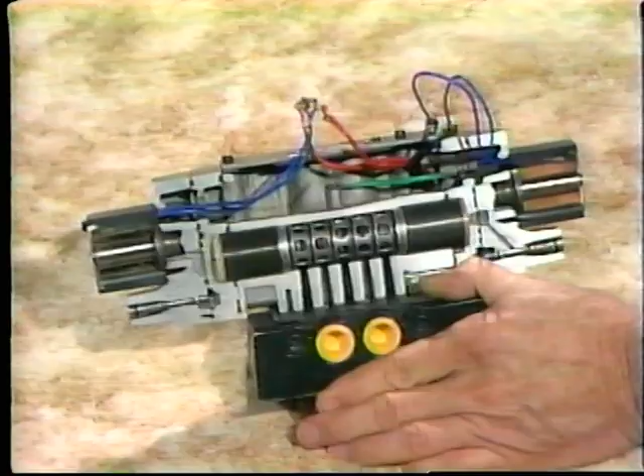Let's start by looking at basic valve design. Directional control valves must be adequately sealed, and we can obtain this sealing either with a shear action or by using a poppet valve. We can demonstrate shear action with this cutaway. You can see that as we move the spool, these lands slide within the valve body.

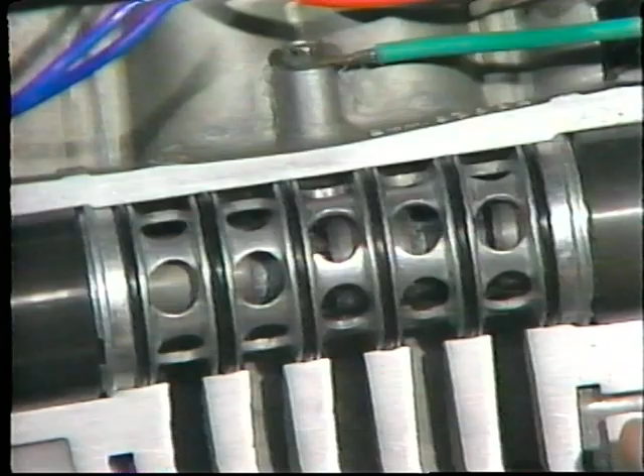When they are in the right position, they close off the desired passage by shearing off the airflow. There are four basic types of valves which use sliding or shear action elements: sliding plate or rotary disc, lapped spool, packed spool, and packed bore.

This is what a sliding plate type valve looks like. This part here is referred to as a D-slide. As you can see, it slides against this mating surface and alternately connects and disconnects these passages here.

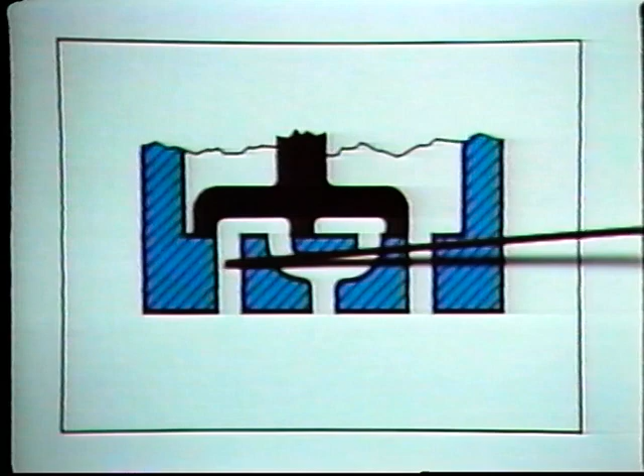In this position, outlet 1 is connected to the exhaust here, while the supply is connected to outlet 2. Here, the D-slide is positioned so that all valve ports are blocked. And finally, when we move the slide all the way over, outlet 1 is connected to the supply, while outlet 2 is connected to the exhaust.

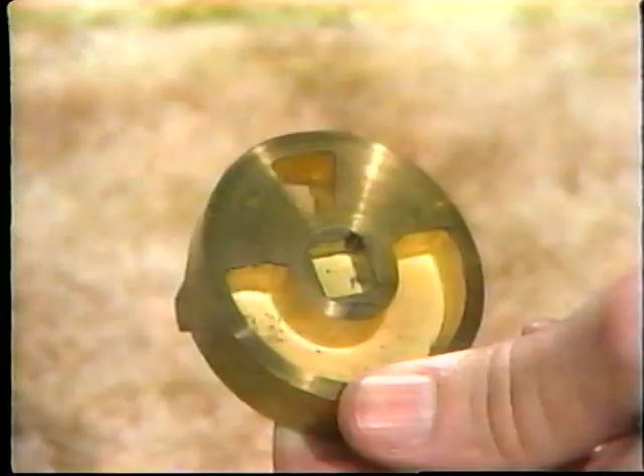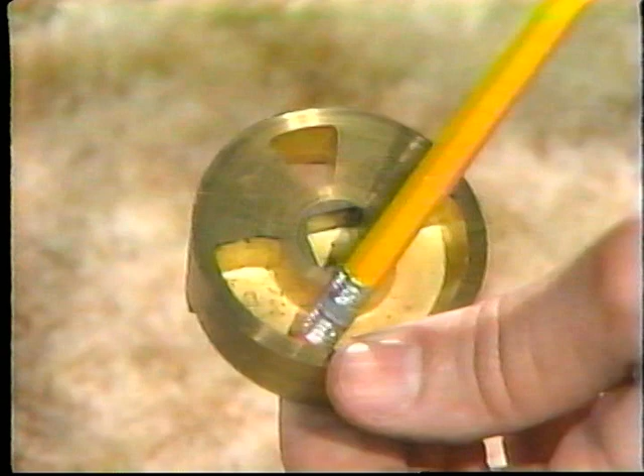We can get the same type of shear action with what is called a rotary disc valve. Here is a disc from a typical rotary type valve. This particular one is intended for 3 positions, and the cutouts are located in the disc so that in the neutral position, all valve ports will be blocked. In fact, openings in the disc can be positioned to achieve all the standard valve center positions we covered earlier.

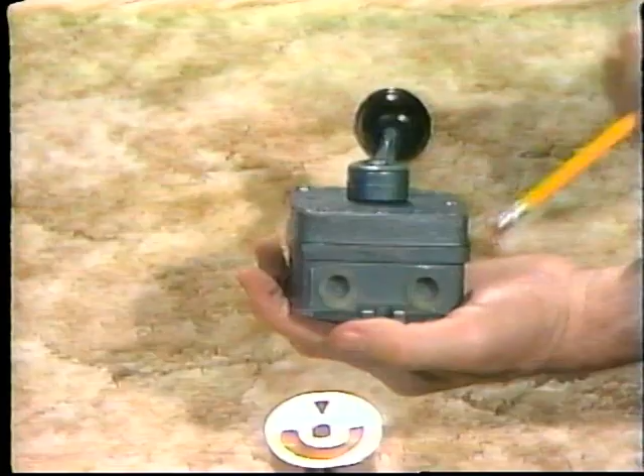Here is what a rotary disc valve looks like. These are the valve ports here on the base of the unit. And this lever here is used to position the disc within the valve.

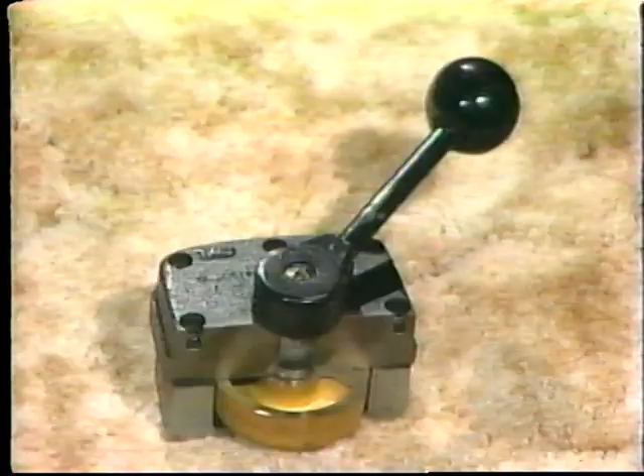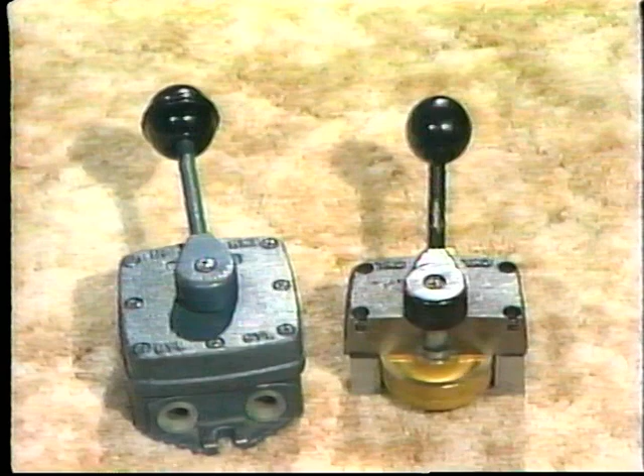The sliding plate and rotary disc type valves have a number of advantages. First, because they have a sliding action, the valve mechanisms tend to wear in. This means they are capable of many trouble-free cycles even under adverse conditions. For example, they work well over a wide range of temperatures. They are virtually unaffected by lubricants or contaminants that might be in the air lines. And this type of valve tends to keep out foreign material from between the mating surfaces.

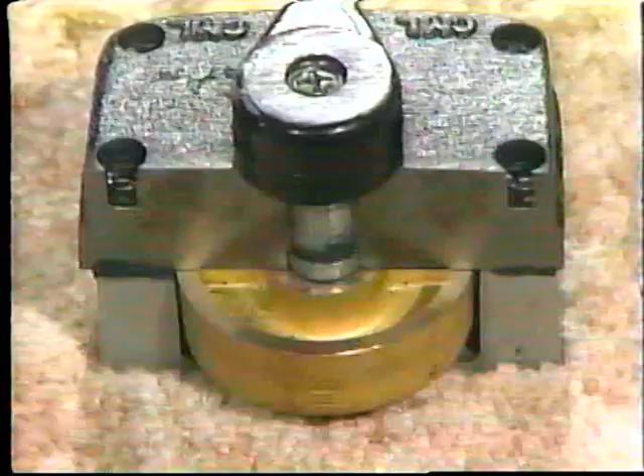You should note, however, that at high line pressures, large forces may be necessary to shift the valve slide, and the valve must be continuously lubricated in order to get maximum life from it. And if the pressure under the plate exceeds line pressure, the sealing member can be forced from its mating surface. So a sliding plate valve may not be suitable where such pressure conditions can occur.

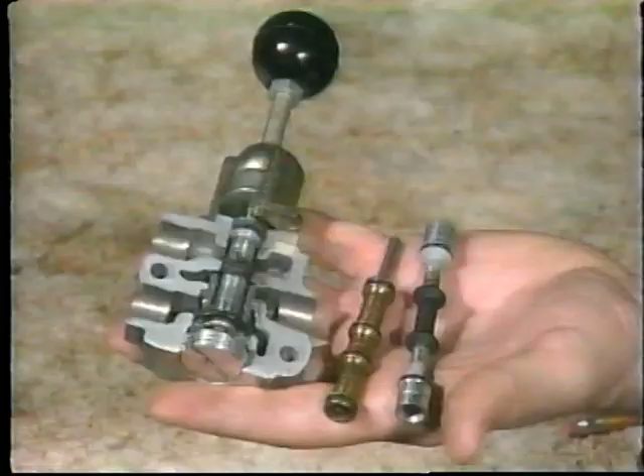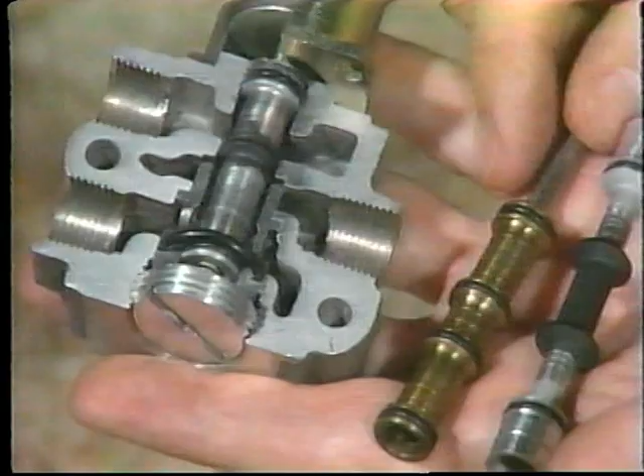This is a packed spool valve. You can see the valve ports here and here, but the big difference you can't see until you look inside. Here is the spool from a packed spool valve, and you can see the resilient seals here and here. These seals slide snugly against the inside of the steel bore of the valve and provide an almost leak-proof seal.

Because they come in contact with only a small area of the bore, these seals are less vulnerable to varnishing in place and need less maintenance than some of the other sliding types of valves. When necessary, the seals or spool can be replaced if the valve begins to leak.

Also, this type of valve is less sensitive to contamination than the lapped spool type that we'll look at in a few moments. But there are other things to consider about packed spool valves. For example, extreme temperatures may cause the seal to change size or become hard. If that happens, excessive leaking may occur.

Also, you should know what kinds of airborne liquids might be in your system. The wrong combination of seal material and airborne liquid can cause the seals to swell, and the valve will require a higher shifting force.

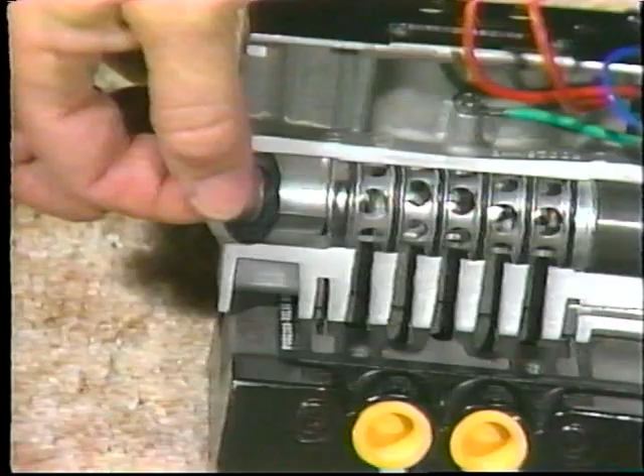Here's another common type of directional control valve. It is called a packed bore valve because these stationary seals here and here are located in the bore of the valve. And you can see it doesn't take much effort to replace them. Just remove the worn seal like this, then drop the new one in place.

This is the spool for a packed bore valve. It is steel on aluminum, and the land surfaces here and here have been made very smooth so as to minimize friction wear of the bore seals. When the spool is shifted back and forth, the lands fit tightly against the bore seals, interconnecting the various valve ports.

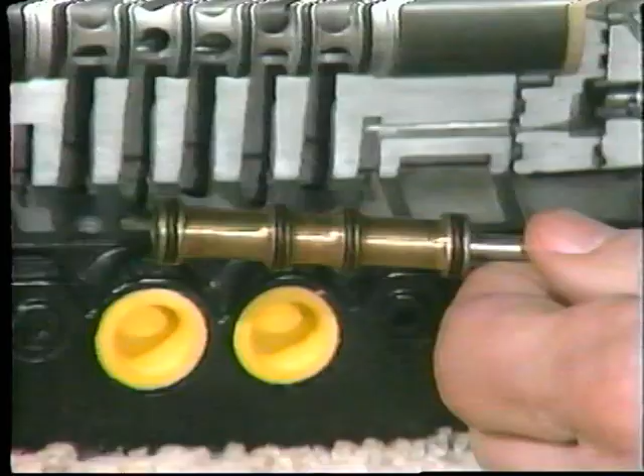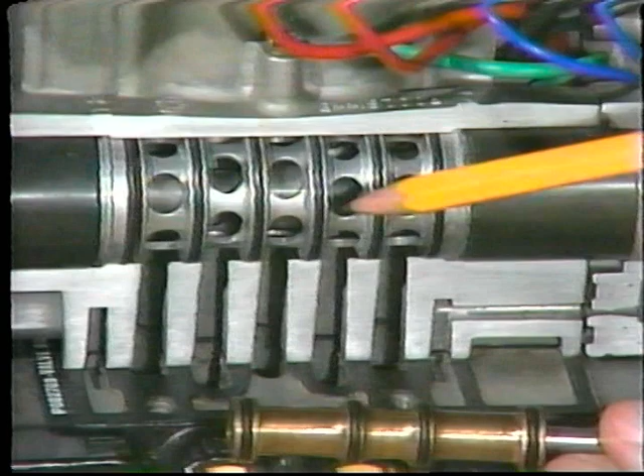Just as with the packed spool valve, make sure the seal material will handle the kinds of airborne liquids in your system without swelling. In fact, the packed bore valve and the packed spool valve have virtually the same characteristics. Just remember, packed spool valves have seals located on the spool, while packed bore valves have seals located in the bore of the valve body.

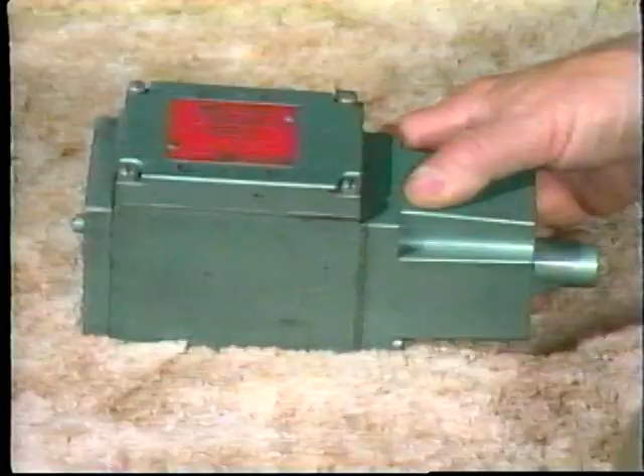Here's the valve body, and here are the flow passages. This one has 5 ports, which can be connected in several ways. All of the contacting surfaces along here are steel, and in order to maintain a good seal, they must all be properly aligned.

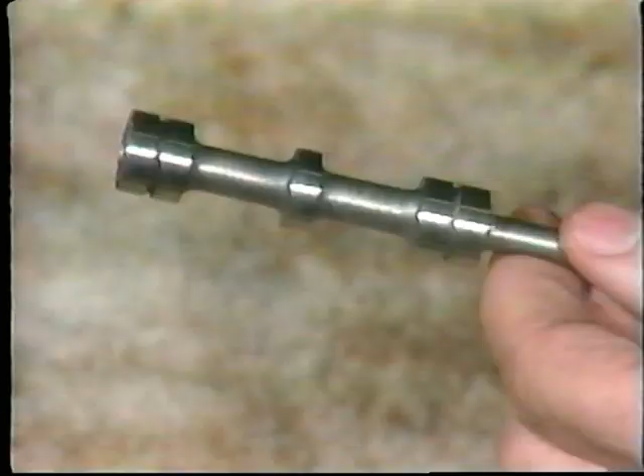This is the spool, and you can see how nice and polished the land surfaces are. This means the valve is vulnerable to any foreign matter that might get between the moving parts. It could cause rapid wear and leakage, or even cause the valve to stick. However, if the air is kept very clean, this kind of valve can last a long time.

The cost of lapped valves is higher than the other designs, and maintenance is generally more expensive. One problem to look out for is varnishing. Because the parts fit tightly, oxidized airborne lubricants, such as from a compressor, may cause the parts to varnish in place. This happens most often after a long weekend, when the valves have been left idle.

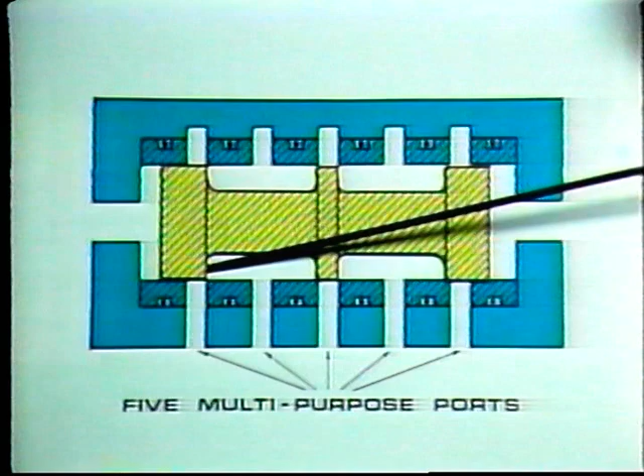One last point. Watch what happens at the land edges as this spool is shifted. Because of the way they make contact with the bore, there is no crossover flow between ports when the spool moves. The open port closes before the next port opens. Packed bore and packed spool valves can also be designed to work this way. This feature greatly reduces the possibility of shift failure, which can be a problem if a valve is operating at low pressure, for example, in a pilot valve application.

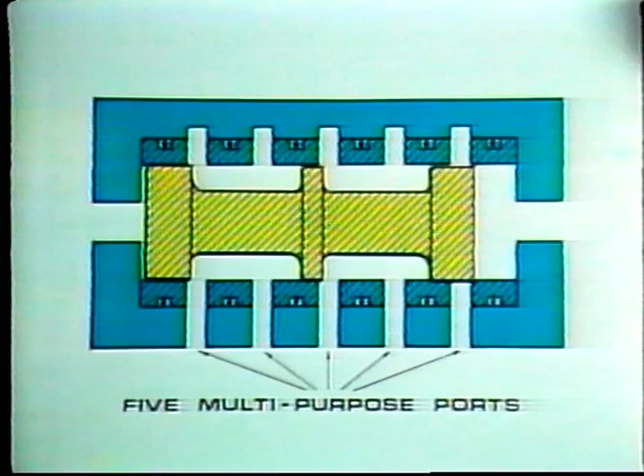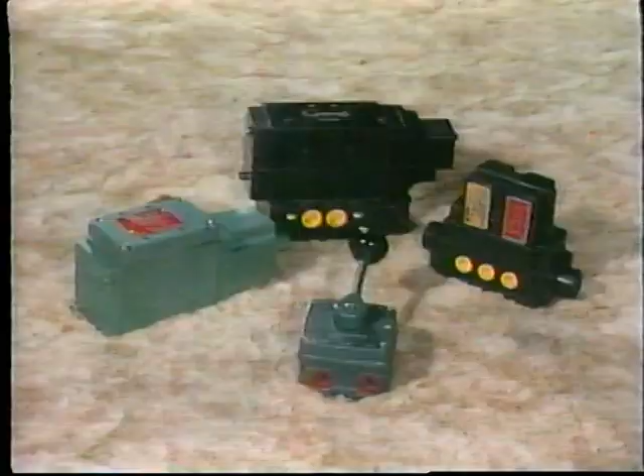You may encounter 4 types of shear action valves. Here they are again: the sliding plate or rotary disc, the packed spool, the packed bore, and the lapped spool. They all are suited for a wide range of pneumatic applications where a directional control valve is required.

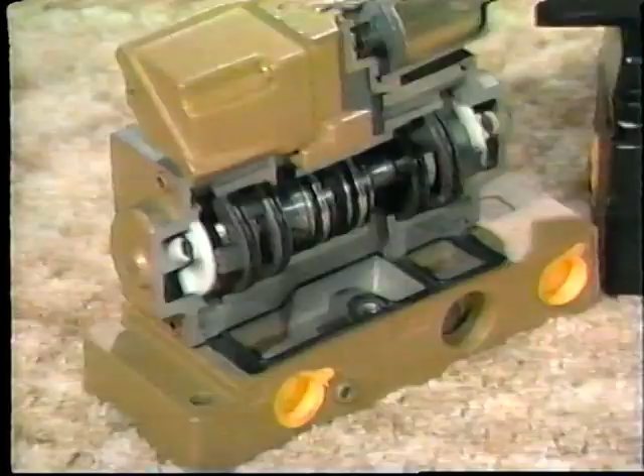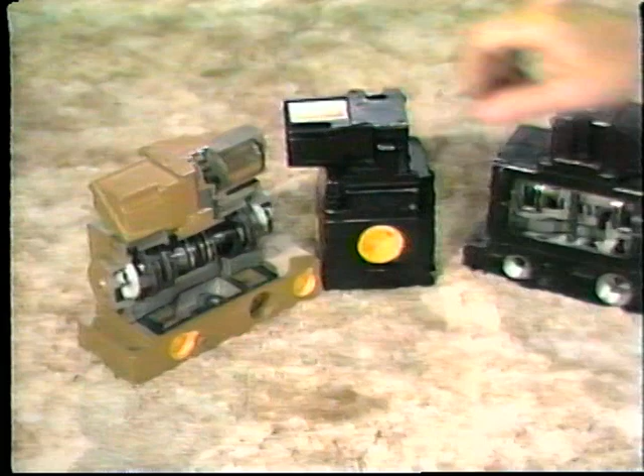In certain cases, however, you may have special requirements. One such case occurs where the valve has to switch a high flow of air, or perhaps the system requires a very fast response. That's when a poppet valve might be used, and most manufacturers make it in a three-way model. It can handle high flows, gives good response time, and because of the design, it has less wear than shear action valves. Port A, here, is connected to the actuator.

This is the exhaust port. And here is port P, which is connected to the system air supply. Inside this housing is the valve actuator. In this case, it's a pilot valve operated by an electric solenoid and air pressure. This small hole is the exhaust vent for the pilot valve.

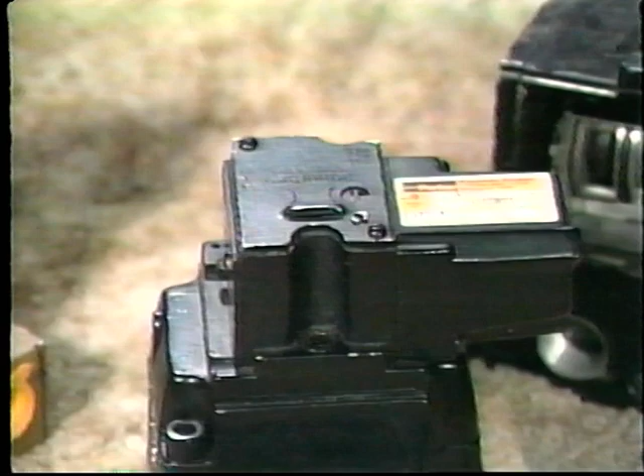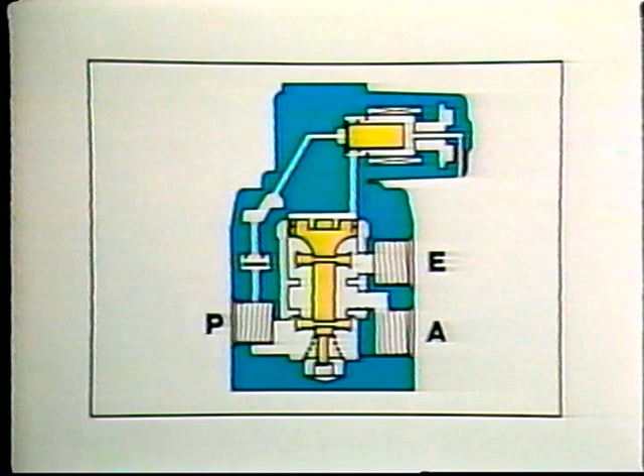When the solenoid is energized, the pilot valve opens and air can flow through this passage, and supply pressure forces down on the poppet. It moves downward and seals against this valve seat. Now there is a passage from the supply through the valve to the actuator. And as you can see, the exhaust port is sealed off.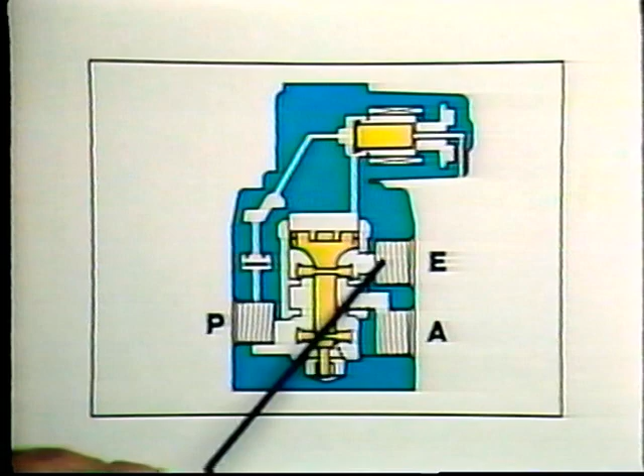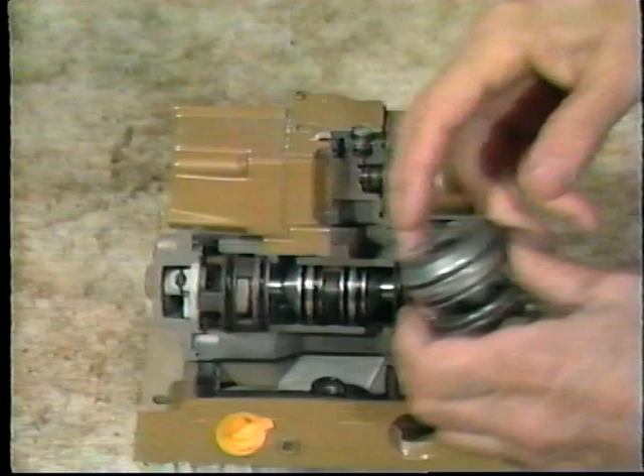The four-way poppet valve is essentially two three-way valves, back to back in the same housing, like this. The poppet provides fast response with a minimum of wear because it doesn't have to move very far in order to open up a large flow path.

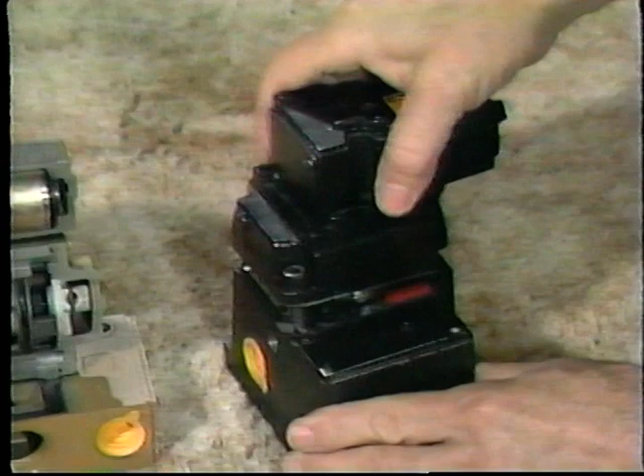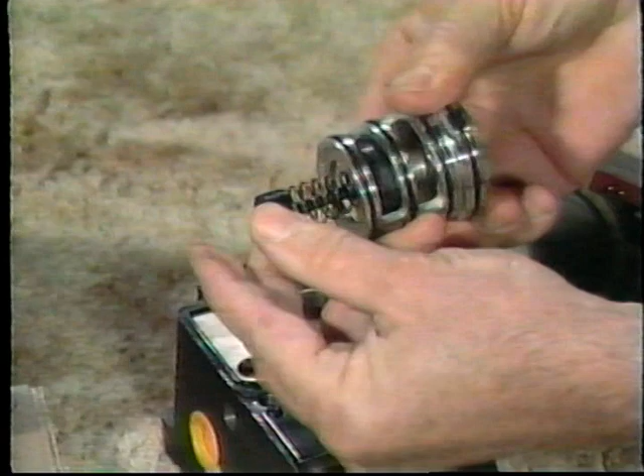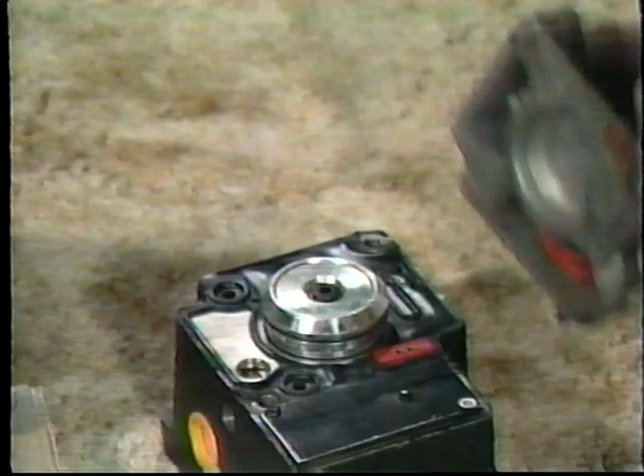Since it comes apart easily and parts aren't expensive, maintenance costs for poppet valves are low, and the design is resistant to foreign material carried through the airlines. However, it is difficult to obtain poppet valves in some flow path configurations, and in many systems, the crossover flow that is inherent in most poppet valves can cause a failure in shifting.

Now let's talk about some things you'll need to know when replacing directional control valves. In order to work properly, the valve must be able to pass the required amount of air to operate the actuator, and at an acceptable pressure.

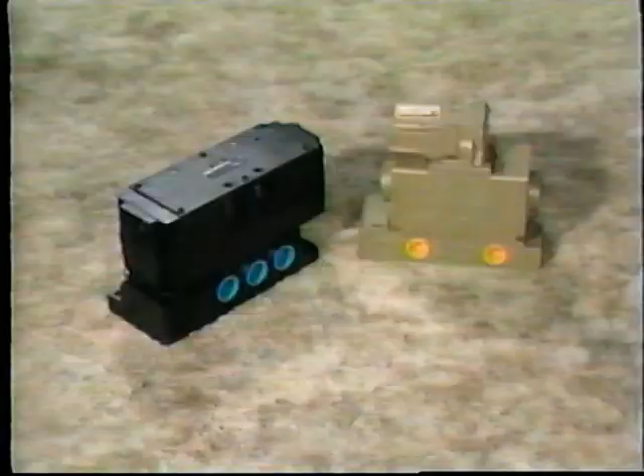This valve has inlet and outlet ports that are 1/2 inch. This one has ports that are 3/4 inch. Which do you think will pass the most air? Well, this valve here, with the 1/2 inch ports, will actually pass more air than this one. The reason being that different styles of valves will pass different amounts of air.

That's why valves are assigned a flow rating, usually expressed as a number called the C sub V factor. The higher the C sub V number, the more efficient the valve is. So when you're replacing a directional control valve with a different model, you want to be sure the replacement valve has as high a flow rating as the one it's replacing.

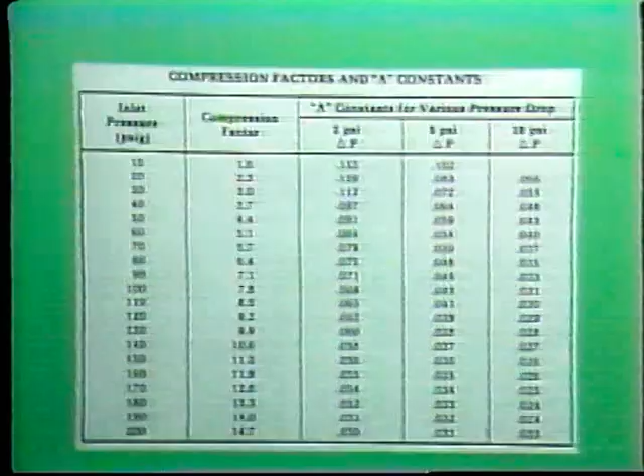Now suppose you're designing a system and need to size a directional control valve. How do you figure out the correct C sub V factor to specify? The job is made easier by tables, usually available from the valve manufacturer. This one is on page 96 of your text. It lists various inlet pressures, compression ratios at sea level, and A constants, which vary according to how much pressure drop is allowable in the system.

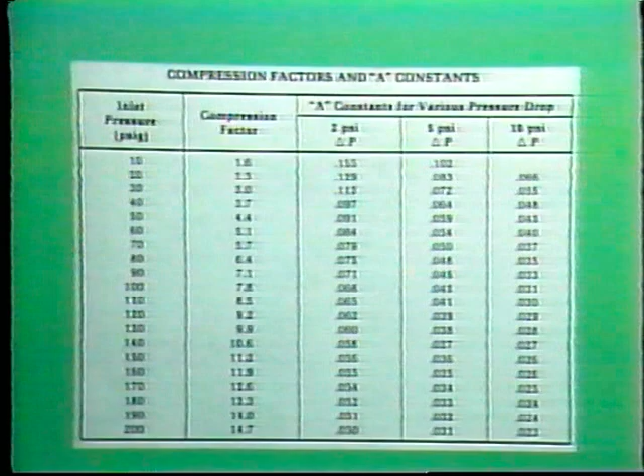With this information available, you can use a simple formula to calculate the C sub V. The flow rating required for the valve will be equal to the flow rate of the actuator times the appropriate A constant. In most applications, a pressure drop of 5 psi across the valve is tolerable, so you'll usually take your A constant from this column.

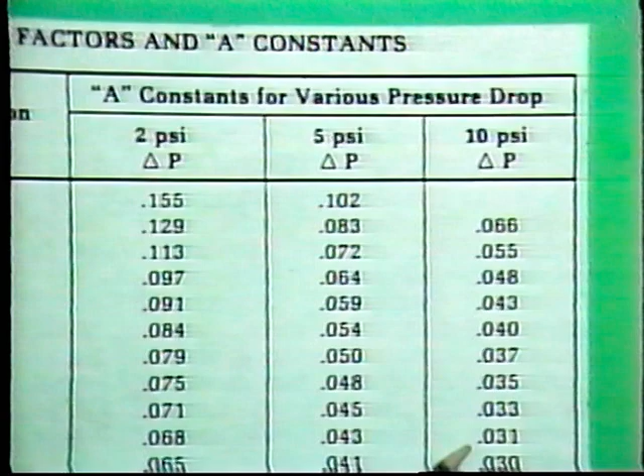In critical applications, however, the system may require a pressure drop of only 2 psi. And sometimes a drop of 10 psi is efficient enough for a system, and you can save money and space by choosing a valve with a low flow rating.

Here's how to use the table. Suppose an impact tool in a particular circuit uses 10 standard cubic feet per minute at 90 psi. What is the required C sub V factor?

Let's say you decide to use a valve with a pressure drop of 10 psi. Then, since the tool requires 90 psi, and the drop across the valve will be 10 psi, you're going to need an upstream or inlet pressure of 100 psi to account for the pressure drop.

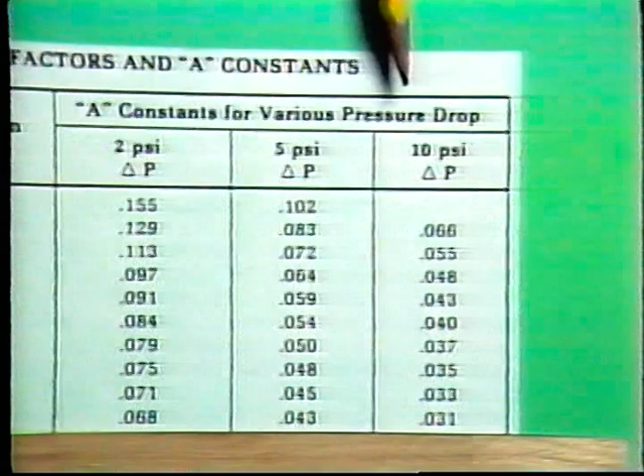Checking our table, you'll find that for 100 psi inlet pressure and a valve with a 10 psi pressure drop, the A constant is 0.031. Now let's put these figures into our C sub V formula. C sub V equals the flow rate of the tool, 10 SCFM, times the A constant, 0.031. The valve will require a C sub V of 0.31 or larger.

Now let's size a flow control valve for a circuit with a cylinder in it. The cylinder has a 6-inch bore and a stroke of 25 inches. It is extended at a pressure of 50 pounds per square inch and reaches the end of its stroke in 5 seconds.

To size the valve, we need to calculate the flow rate of the cylinder using the formulas we discussed in Chapter 7. First, we find the volume of the cylinder. Then, using the volume, we calculate the flow rate. When the math is done, we find that the cylinder has a flow rate of 21.6 SCFM.

Now we are ready to calculate the C sub V. Let's assume we need a very efficient circuit, so we'll choose a valve with a pressure drop of only 2 psi. Since the cylinder requires 50 psi and the valve has a pressure drop of 2 psi, we'll need an upstream or inlet pressure of 52 psi.

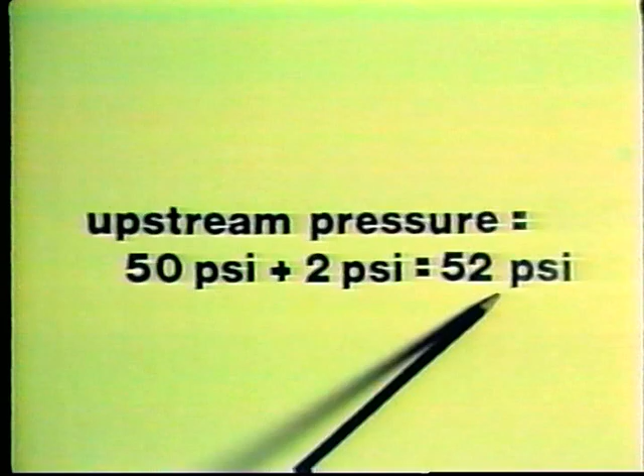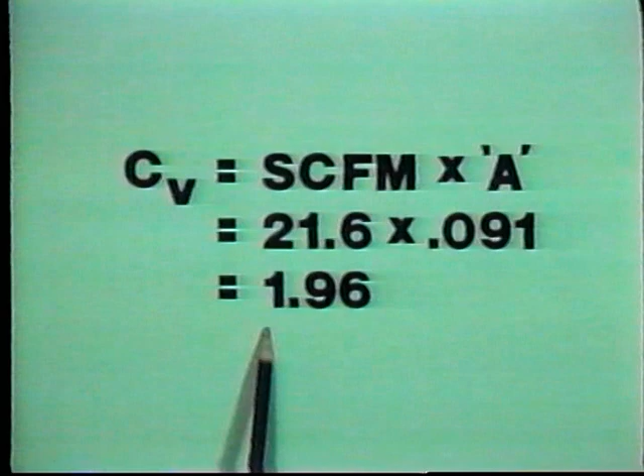So the A factor from the table is about 0.091. Using our C sub V formula, we find that a valve with a C sub V of 1.96 or larger will do the job.

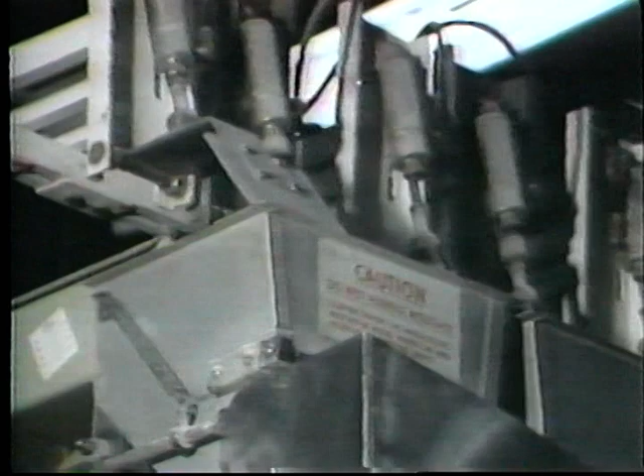Another consideration: the response time of control valves is becoming more important since pneumatic systems are being used more with rapidly moving equipment and often have to provide split-second accuracy in operation. In Lesson 4, we explained that actuator speed, the rate at which a cylinder rod can move, is determined by how fast the cylinder can be filled and exhausted with air.

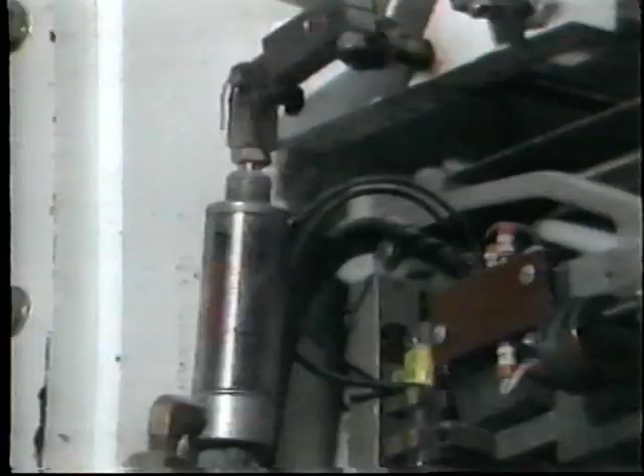So when a directional control valve is used, it must be properly matched to the cylinder it is controlling. When a circuit is being planned, the designer will take into account the volume that has to be pressurized and the time it takes to actuate the control valve itself. Generally, where small volumes are to be pressurized, such as on very small cylinders, small ported valves will give faster response than large ported valves.